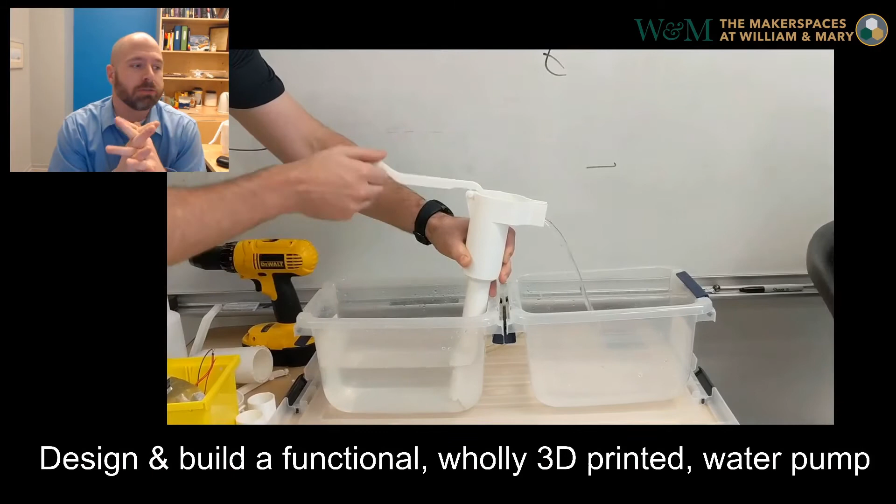Hey everybody. Today we're going to start looking at how to produce a fully 3D printed working water pump. It's actually this one right here, this pump here. And there are several parts to it. We'll go into each one of those parts in this series of videos on how to design and build it from scratch.

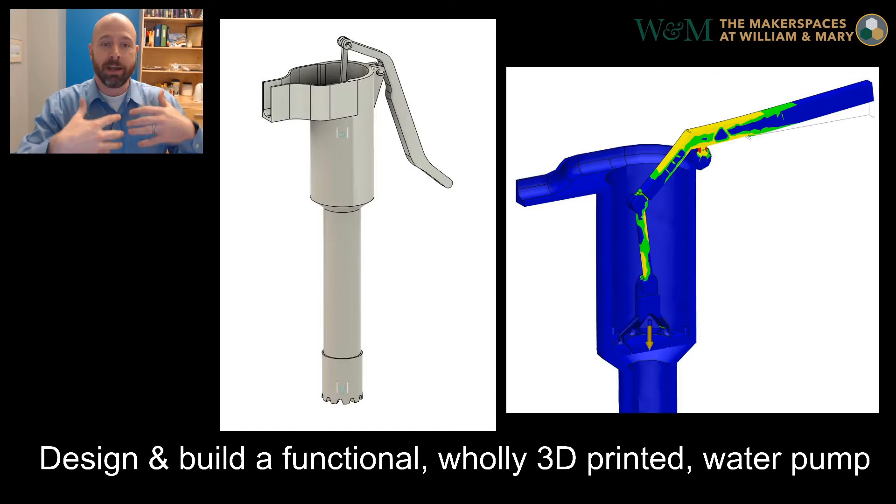So we're going to walk through all these things as we work towards understanding the design choices behind making this water pump, the actual design process, and then finally getting it ready for 3D print and finite element analysis. To start understanding how this pump works, we want to look at the full model and specifically the two valves that are embedded into this model.

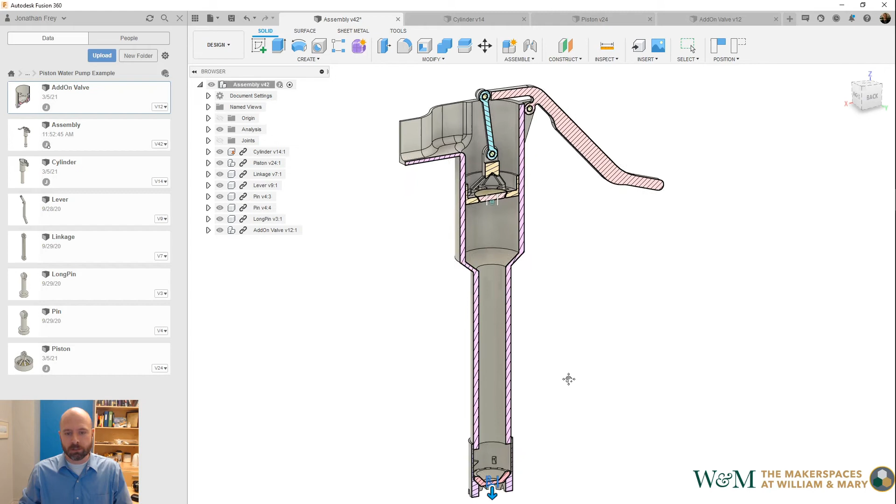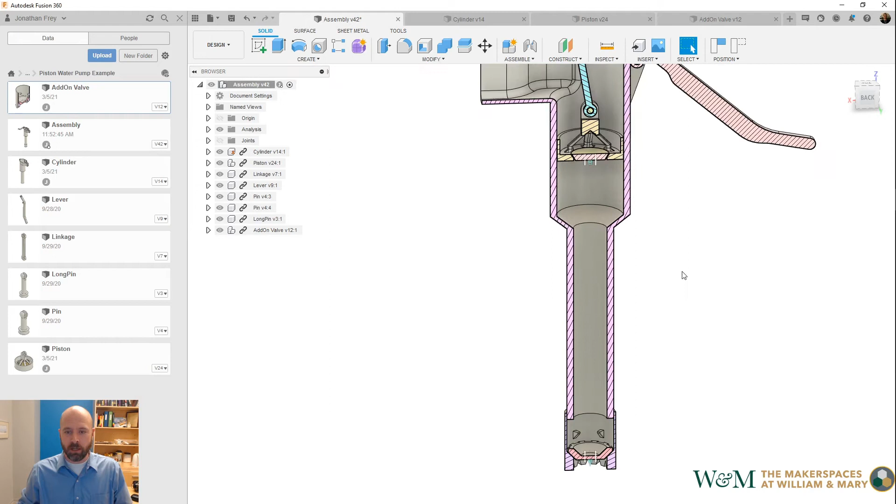If I use an analysis plane to slice it open and look inside, you'll see in this model there is the mechanism we are all familiar with, which goes up and down—the rocker slider mechanism, like so. And then there are two check valves embedded in here. You've got the piston head, which has a form of check valve, and then down at the very bottom, there's this add-on cap that I designed in to also have a secondary check valve.

So that brings up the question: what really is a check valve? When I say check valve, all I'm referring to is a physical mechanism that allows water to flow in one direction and not in another. It checks the flow—water can go through a pipe in one direction, but it cannot go backwards.

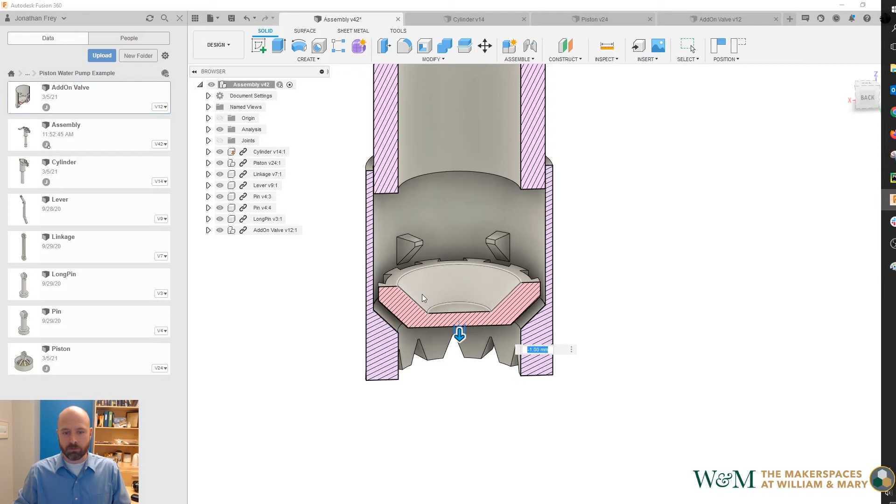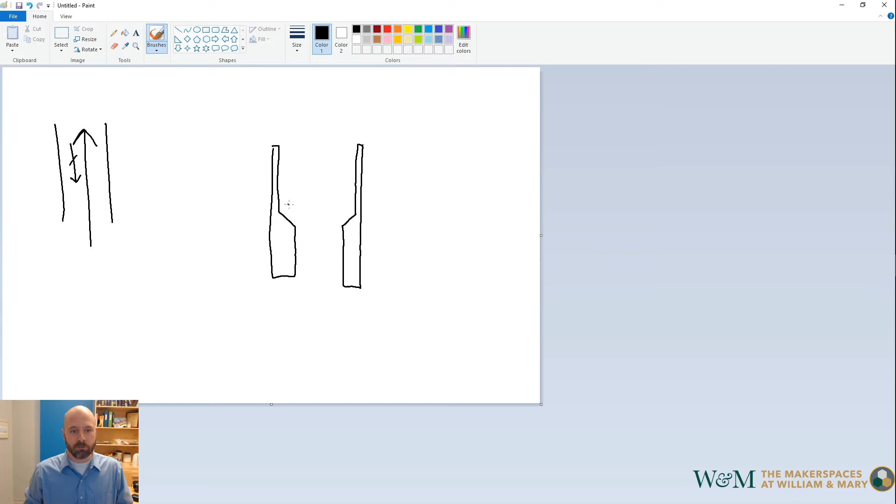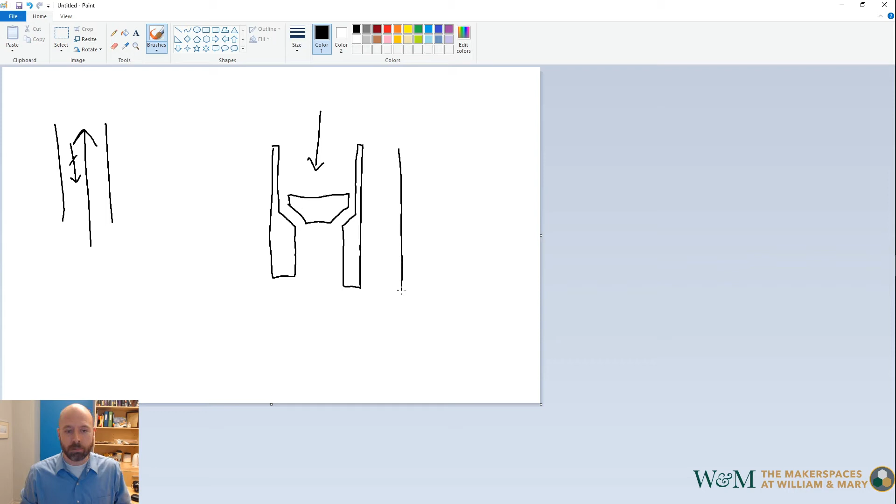Now, if we look at this bottom check valve, we accomplish checking the flow in one direction by simple means of having an optional seal, depending on where this cap will flow. So when this cap is floating in here, water is free to push it around. If I've got that structure that looks like this for the side walls, and then I've got the floating cap in here, when water is pushing this direction against the cap, it will push the cap into contact with this sidewall, thereby sealing it off so no water can get through there.

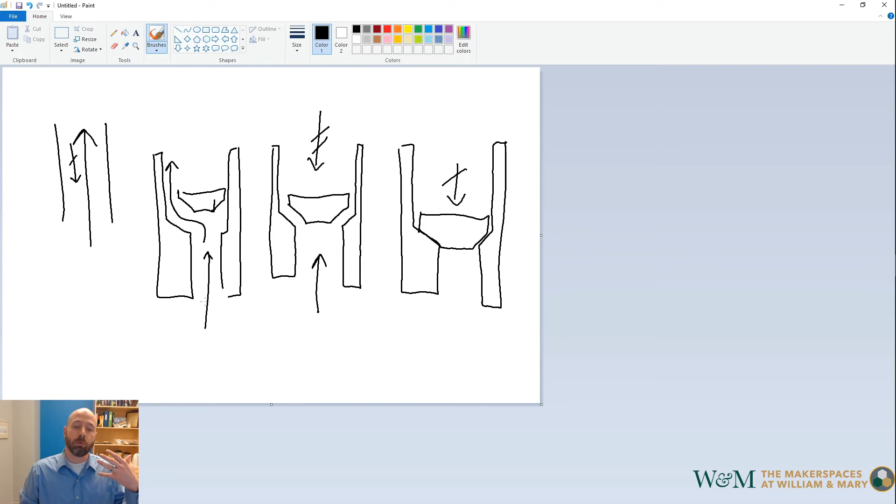That make sense? Now in the other direction, water can't flow down—it's stopped by that cap. In the other direction, when water is pressing against that cap, we'll draw it over here on the side very quickly and poorly. When water is flowing in this direction, it'll actually push the cap further up, like so, and water is allowed to flow around the side of that cap. So with just having a little shaped cap covering the channel, you allow water to flow one direction and not the other.

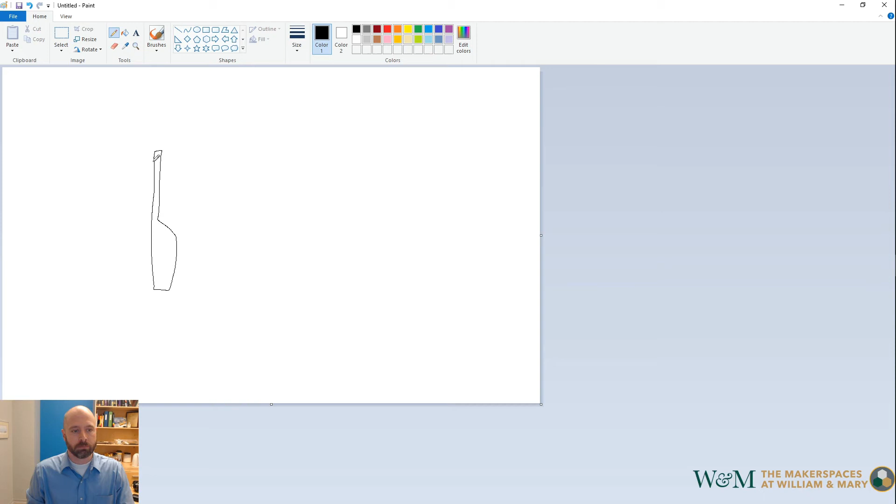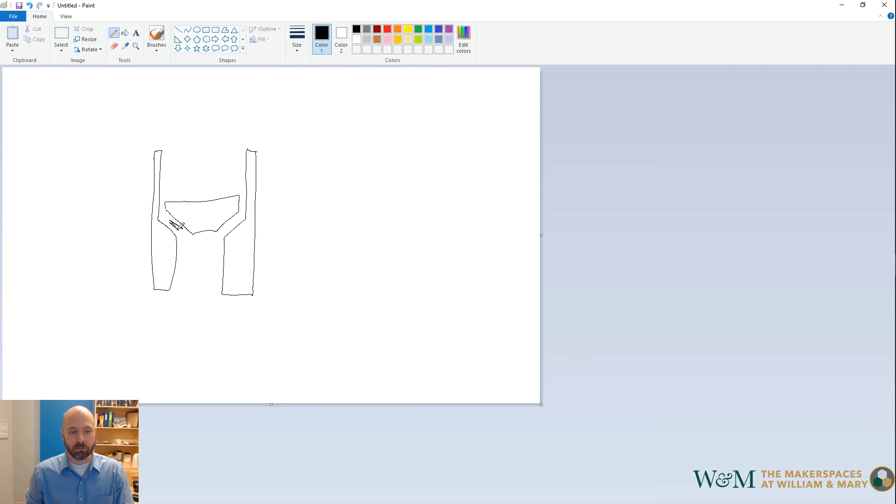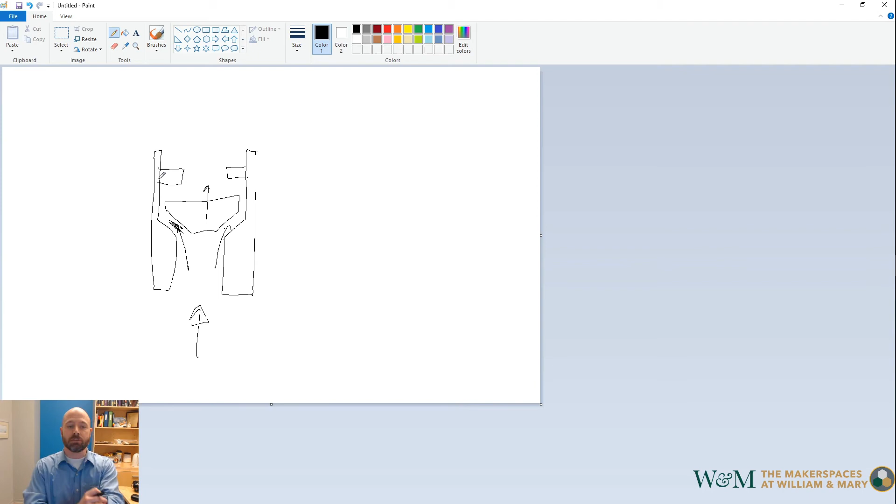One thing we have to add necessarily when doing this sort of check valve design is a capture mechanism. With the current design, you've got these sidewalls that contain a chamfer, and then a cap that sits in there making a seal in this area, depending on whether the water is flowing up or down. If the water is flowing up, however, and this cap is free to move, it will get flushed completely out of the channel unless we add some sort of retention element—a little stub of plastic or design feature that prevents it from flowing all the way out.

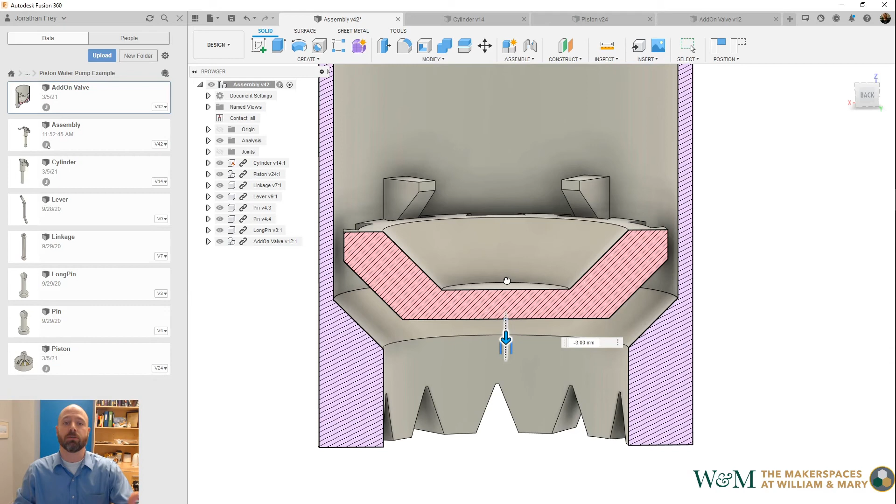Now if we look at the cap design in Fusion, we've done just that—we have these little nubs that prevent it from flowing out. If I turn on contact, I can show you this will move up only that far and move down to create a seal, and it'll move up only that far when it hits those little buttress elements, and it is prevented from going any further.

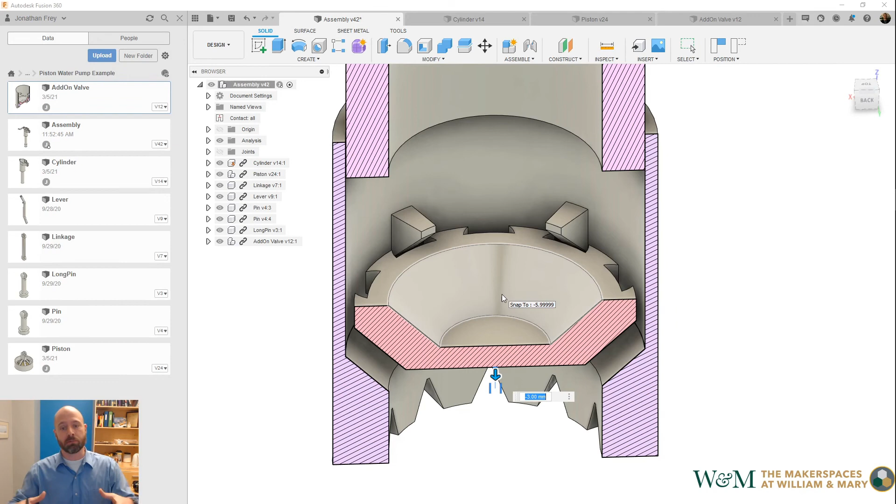Additionally, I added some other things to this check valve mechanism. To increase flow rate, I added these little notchaways here. That also enables the cap to stay in proper alignment because these buttresses fit into those grooves. And then lastly, I added—well, the buttresses themselves, if you notice, are not flat horizontally. They are angled at 45 degrees.

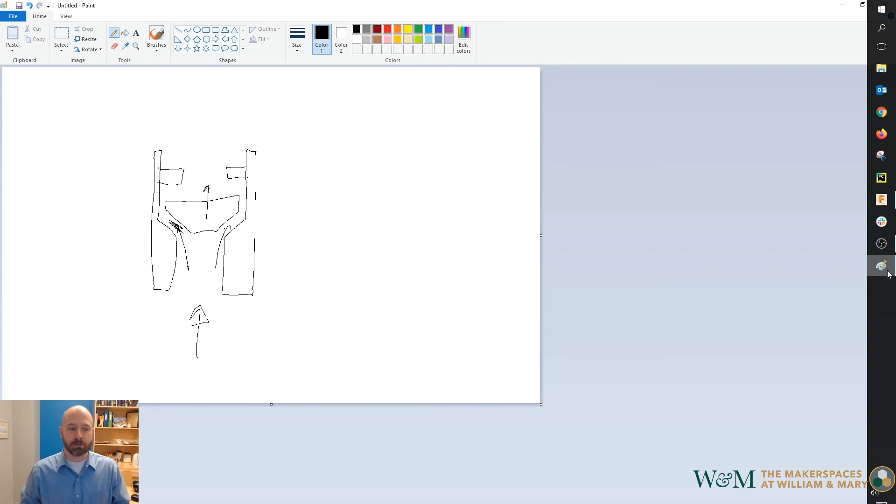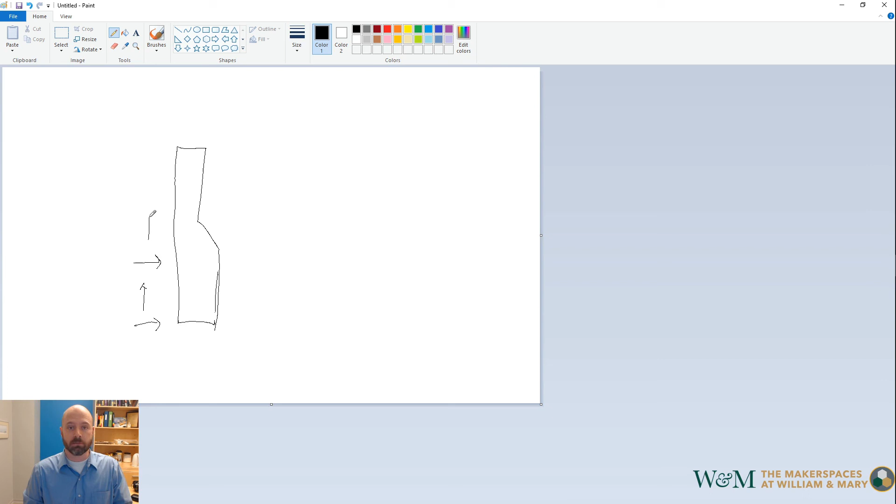I do that specifically because those buttresses are going to be 3D printed. The entire goal of this model is to be 3D printed, and if we print from the bottom up—here's our wall—the printer creates the bottommost layer first, then moves its way up, creating layer by layer. If we were to try and print just a simple overhang like this, there'd be a problem, because we'd be printing plastic where there's nothing below it to support it.

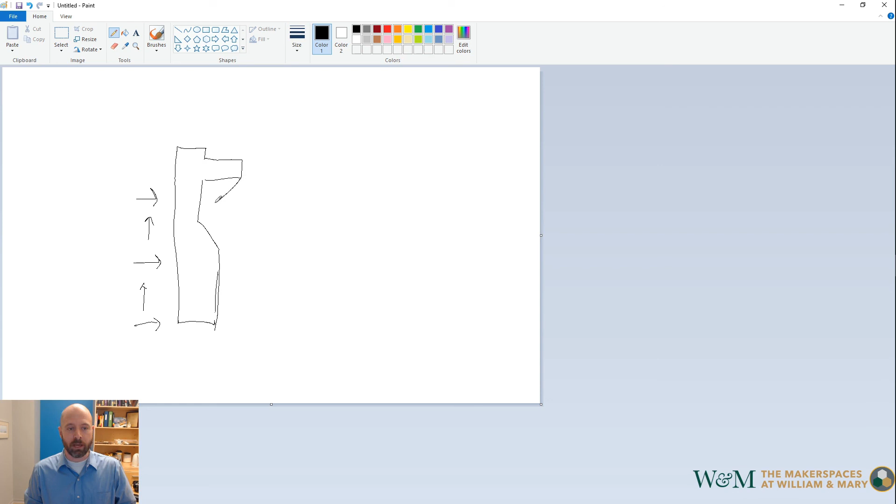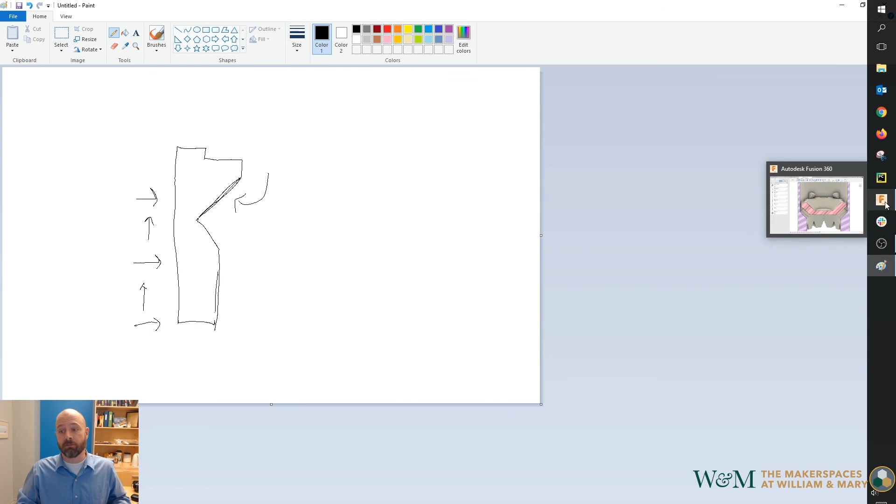So one easy way around that, if you're designing for 3D printing, is to add a 45-degree chamfer to whatever design feature you're making, and then it can grow the part horizontally as it moves up. Now, I should say, you can add chamfers like this to a 3D design if it doesn't impact the way your design functions negatively. In this case, I added other features that correspond to the vertical or horizontal growth of this buttress to take advantage of it. But as long as this added 45 doesn't negatively impact the rest of the performance, you can go with it.